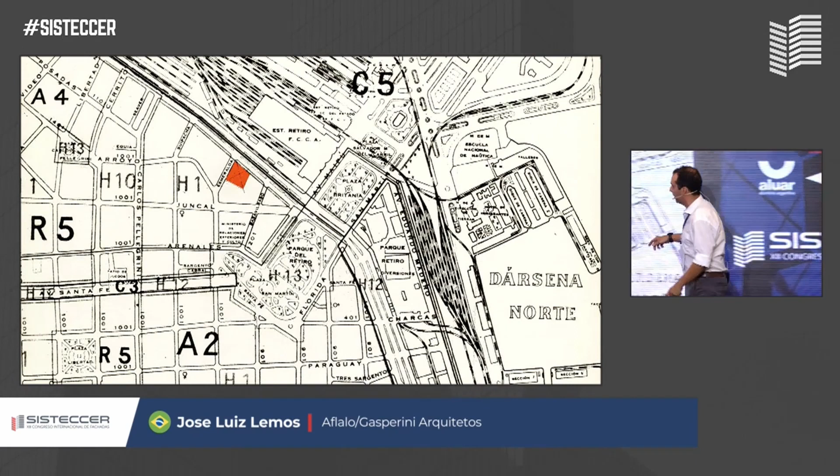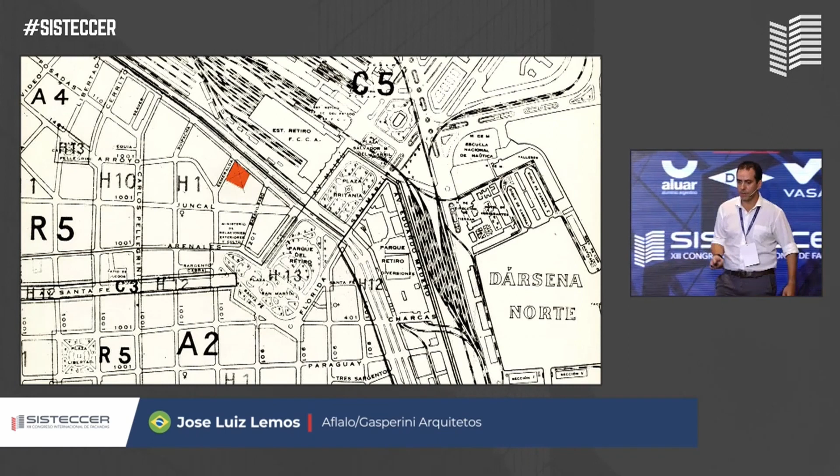The site, just to situate yourselves—coincidentally, I didn't know that—we are here right now, and the site is right on the next corner. This was an invitation. So this is today, right? We're over there. This was an international invitation for a high-rise tower.

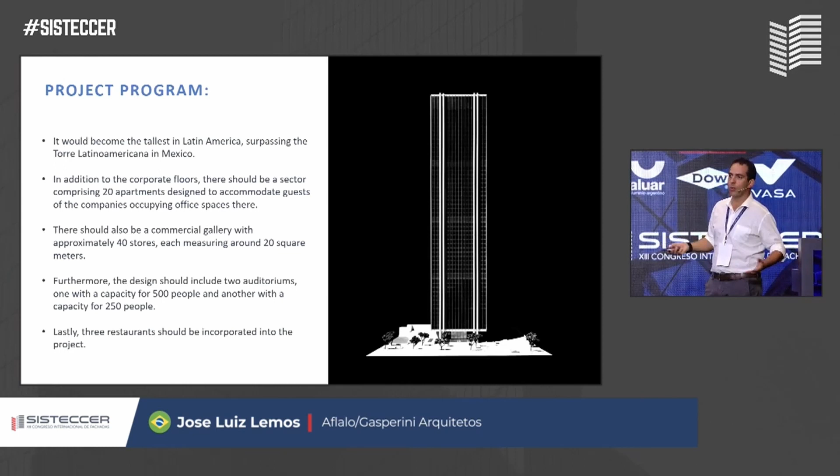It was supposed to be the highest tower in South America or Latin America, surpassing the Latin American tower in Mexico. There were almost 200 participants from all over the world, and this was the winning entry. I'll go through it, I have a lot of stuff here.

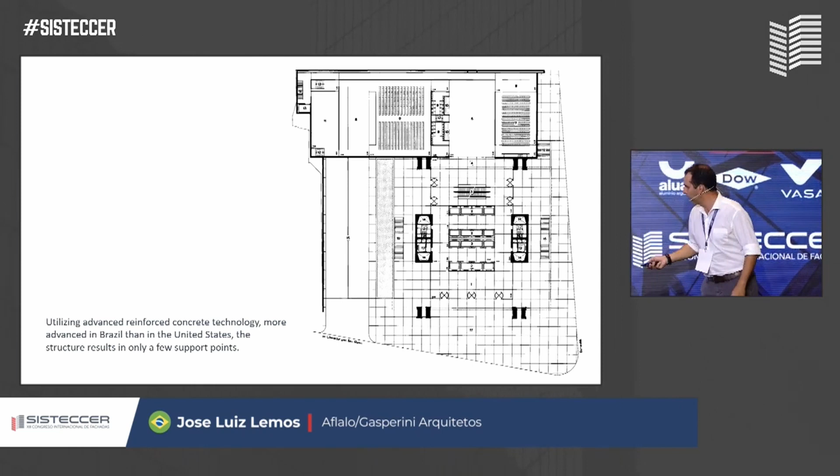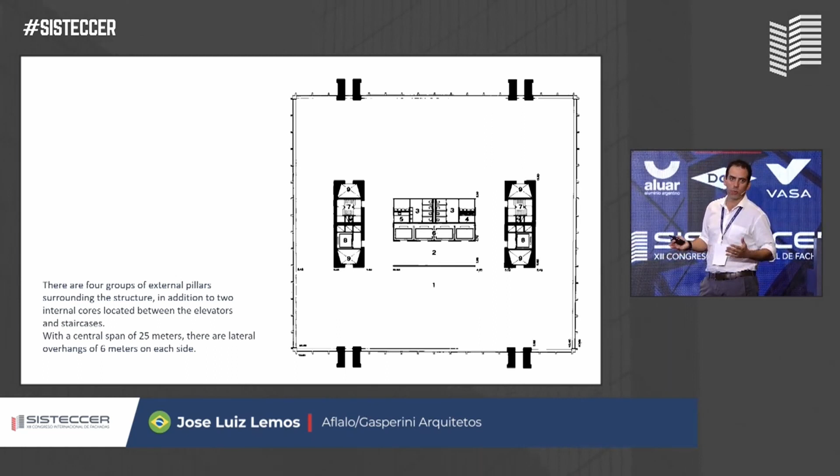It was basically studied a lot, and it set, as they say, the principles that basically set the office to work like this until nowadays.

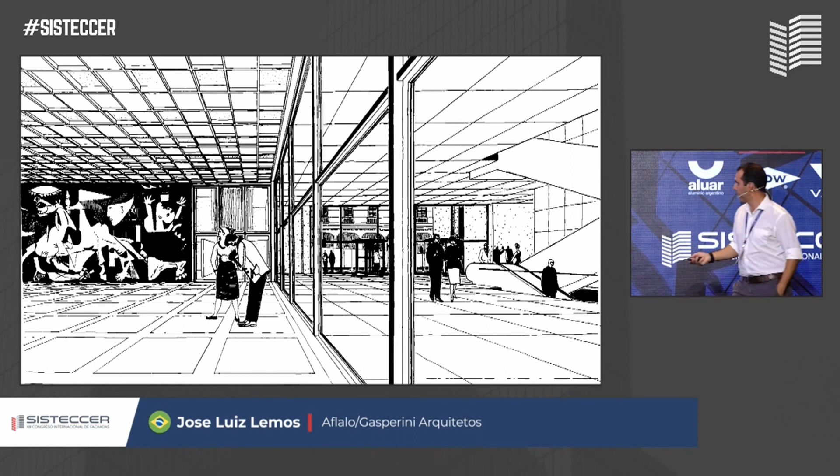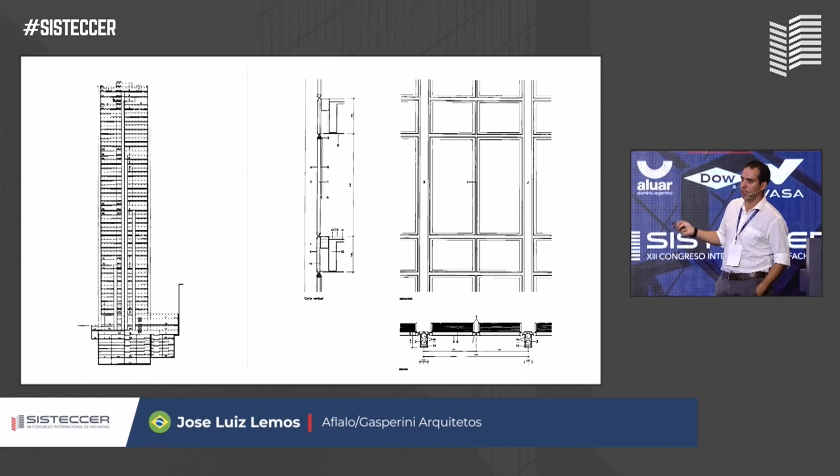Based on this project, the result and the amount of these representations of the competition entry—a lot of in-depth engineering studies went into making it as feasible and constructible as possible. We came all the way to construction documents on this, but it didn't go through to construction itself.

But coincidentally, there was an exhibition in MoMA in New York, I think like seven years ago, something like that. They had a small corner there that showed the competition entries, and they showed all these fancy things and wacky stuff.

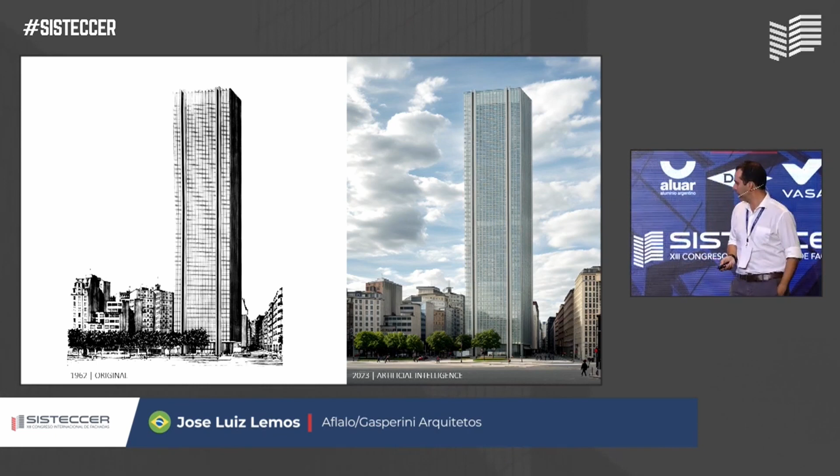So this is an image of the original, and we played with AI just to bring it here. So based on that—60 years—I'm going to throw out some relevant projects that were part of our history.

In the 1970s, we did the headquarters of IBM in São Paulo. It's still there. Later on, like 15 years ago, we did a renovation of the glazing system to bring new technology of glass and glazing, since it was totally outdated, but it's still a very relevant architectural piece in São Paulo.

From that time, we did several projects. I like to show that image because it shows a lot of representation of the architecture at that time, and also the pace of the design process. To do an image like that, you had several people working several days. Today, we have 20 renderings in 2 minutes. So it's a different moment on the project.

So this is another glass box for the Metro Operational Control Center. Some of the late towers based on a structural grid with the outer circulation cores, and some of the representation of the area.

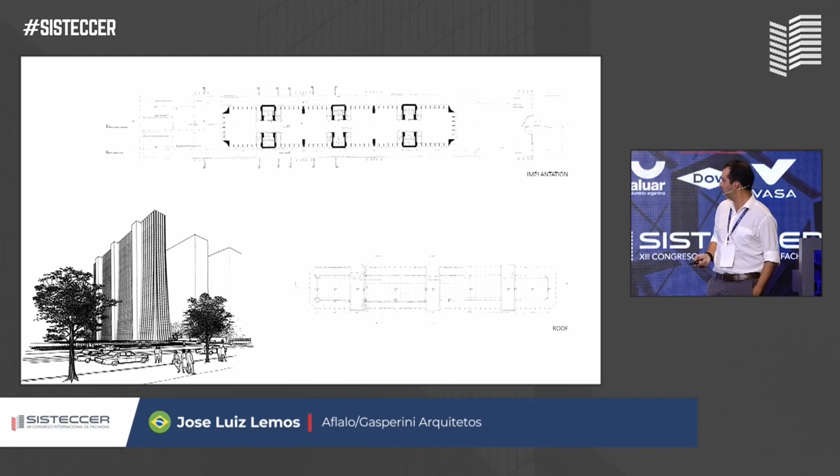This is another one, a corporate project, a headquarters of a bank. This shows some of this concrete grid with the glazed in between that we've been working as an architectural language for several years. This was a very important project in the office, because this was the Citibank headquarters in São Paulo.

To do that was a turning point in terms of technology and systems in Brazil. It was the first building ever to have a glazed system in Brazil. It was the first building to have not glued stones in the facade, but hanging with the American system. And it was the first building to have an ice refrigerator for the air conditioning and all that.

We basically had a whole office built somewhere to develop this throughout the years. And that set up the new standards for corporate office that guided us in the following years for many different projects.

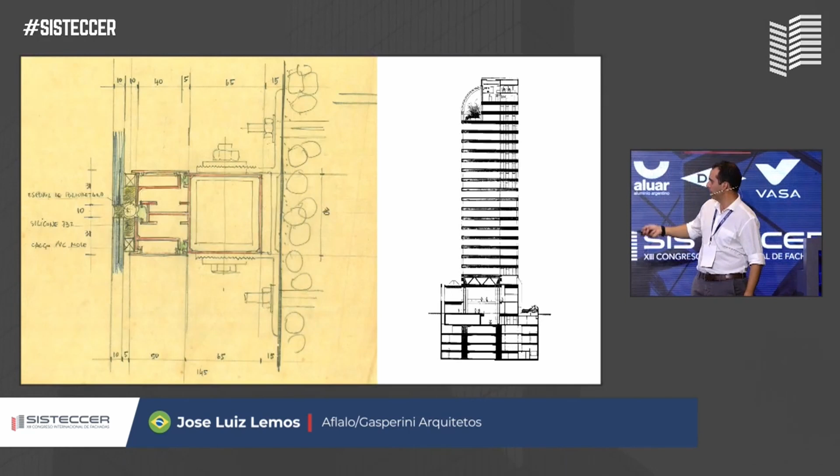I found this interesting, a sketch at the time, mid-'80s. So following that, we have a family of projects in a neighborhood in Brazil, used to be an old factory neighborhood, and we decided to design it over 2 decades, a family called Atriums, which started with that one on the right side there, creating this big atrium.

This grid we started using as a language to develop a series of a family of projects that was done throughout different years. They had a lot of urbanistic issues, like to expand footpaths, bring people to the ground floor and all that, but it's not the case here. At that time, this was very innovative as well.

In '92, this glass box started, another bank headquarters. This was also a different language from what was being done at the time.

And then we talk about sustainability. This tower was the first LEED Platinum tower that we designed in Brazil. This was done in '98. It was done a little bit late, but it's interesting that it's all glazed.

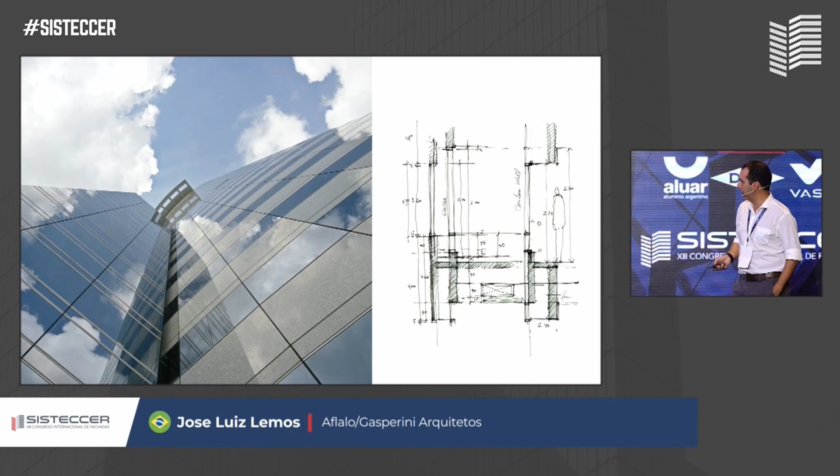This is another important project because it was the first project done with a unitized system in Brazil. This was in the early 2000s. It was kind of interesting because you could see the precision of the unitized system versus what we've been doing before that.

You could see the granite very plain with the glaze, and everything changed after that. Here you can see a moment of the project with the unitized system, and here a glaze within columns built separately, and then the terrace here. So you have 3 different construction systems in one picture, we had it all in that project.

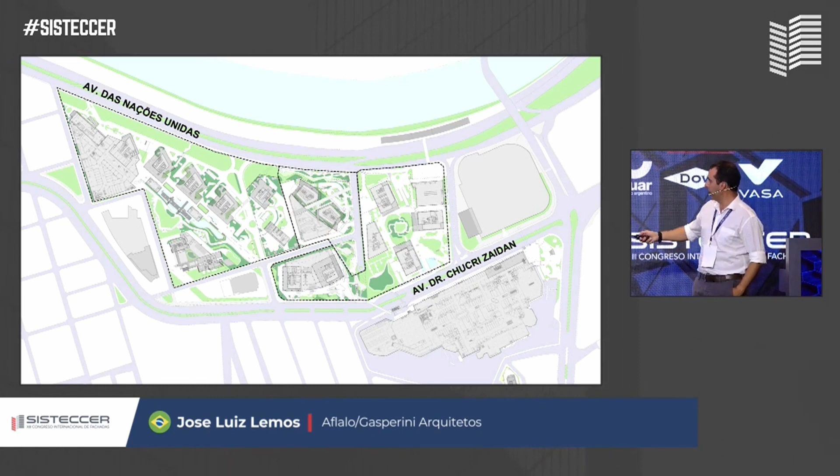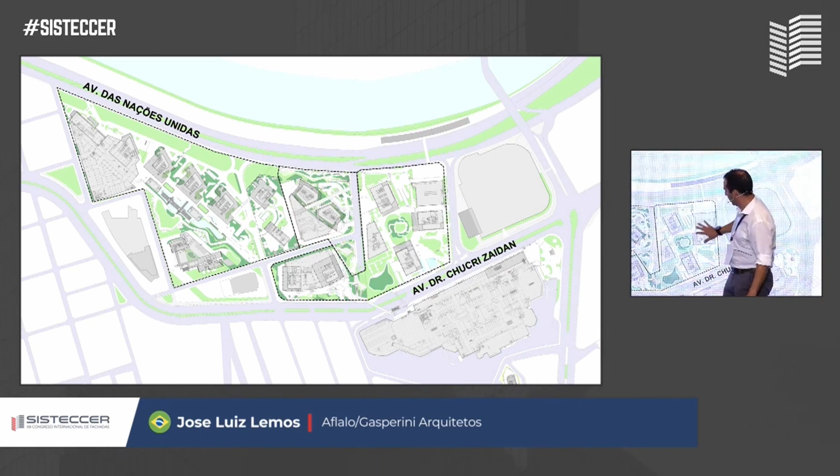This is an area where we did several projects. This is one project we did in the late '90s, including all of these towers here and this footpath. Several corporate towers developed over 2 decades, so basically we did a lot of work on these towers here.

So this is one of them, Rochaverá. I believe that's where some of our Dow offices in São Paulo are, and some of the images here.

This is another project which was the same owner as the shopping center across the street. We had the opportunity to design a footpath that links both malls, a glazed, air-conditioned pedestrian bridge open to the public.

It was an interesting project to develop with escalators and all that.

Still on certification, I'm not talking a lot about sustainability here, but we always say that it's a consequence of the process. We always did that, and of course the new materials and the way you measure and the glazing and all that lead us to whatever we are developing.

This was an interesting project where the client said, I want two towers, but it looks like one. There had been a competition done elsewhere that didn't happen, so we had the idea and brought it here. He was shopping around for different architects, but in like three days we had the design and went forward. He bought it and all that.

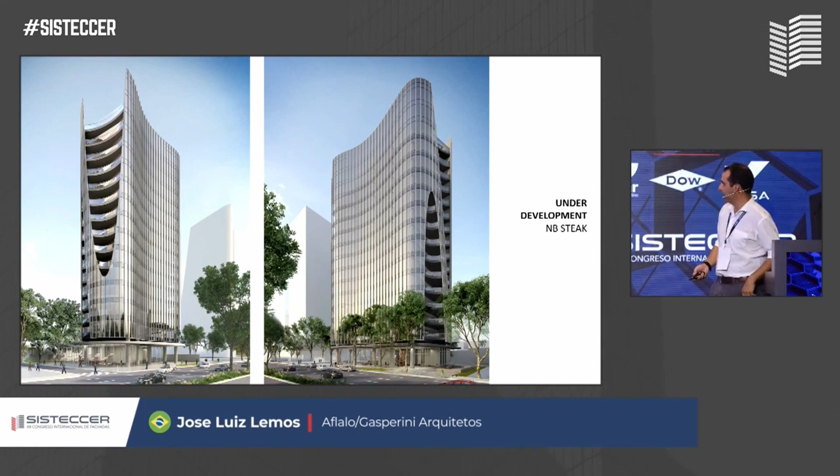And some of the other stuff that's under construction now, like this. I still have some time here, so some of the stuff going on right now in our office, some of the latest developments under development.

Another thing we've tried to use a lot is playing with textures, using the mullions and details to create something intricate with the architectural language, bringing scale and language to some of these. Those details, with small overhangs and transitions, let us do an architectural composition that creates interesting moments.

Depends on the light of the day, the shades and all that, kind of nice. Or otherwise, with these terraces, we also try to do something playful with them.

It has some nice moments, sometimes it's just a very simple glass plate that defines the building. What's interesting in this one is it has this shading device, but the surrounding is all chaotic residential buildings, and then you have this big mirror in the middle, which is interesting because it melts everything out, and it doesn't try to stand out from the rest of the buildings, but it blends it all, disappearing into the landscape.

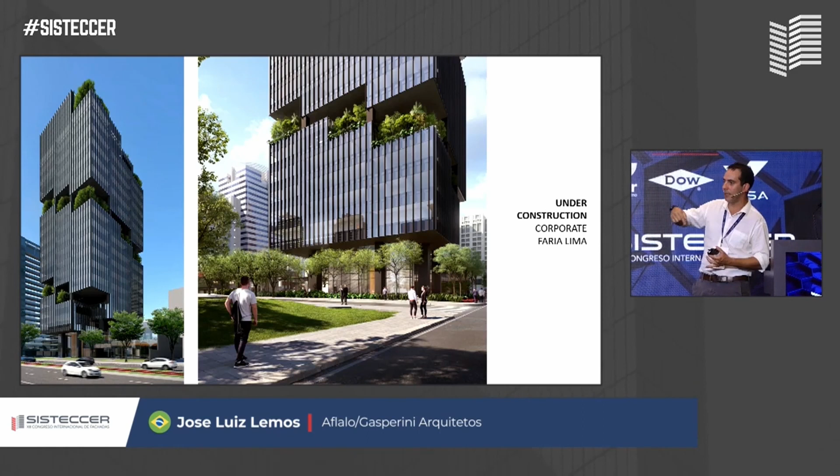You can actually walk throughout the building from outside this office space. And this is the kind of environment you have in each of the floors, and you can actually go from one to another. So if you lease 3 or 4 different levels, you have all of this communication space, this buffer of green gardens, and it's right in the middle of the city.

This is an interesting project. We've been working on it now, but we've been working for the past 6 years actually. It's interesting because it has a bit of everything.

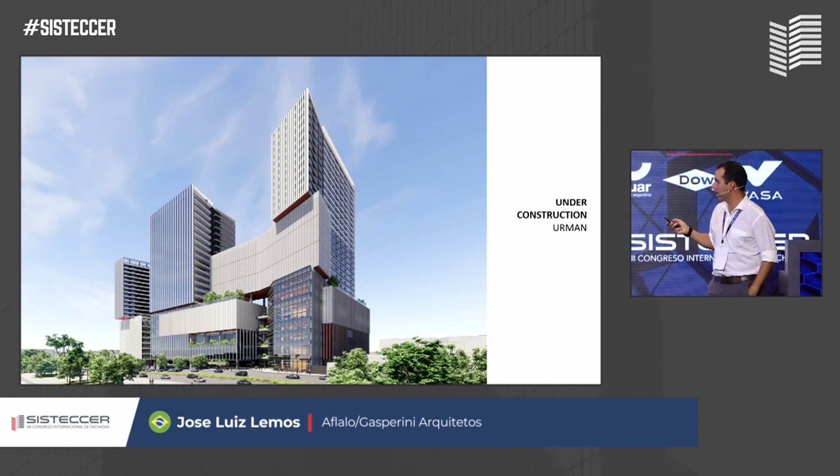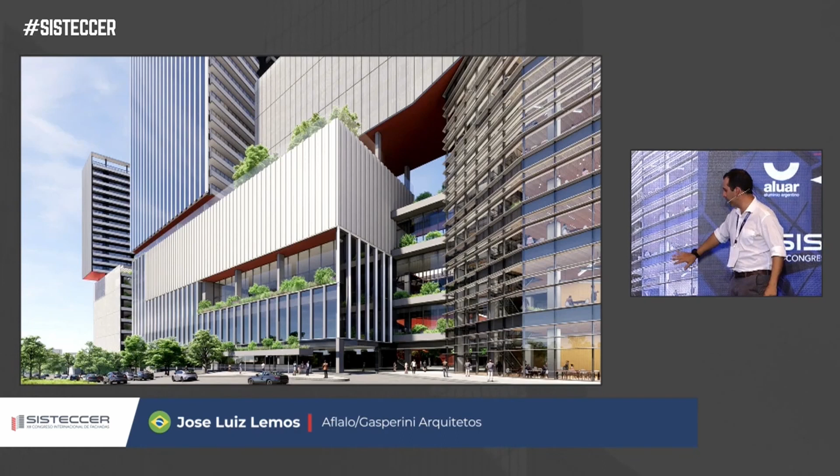This is like a very - we wanted a very transparent, it's kind of a gastronomic tower we call it. This is a very busy road, so we want this to be as transparent as possible. So we're looking for low-E glass.

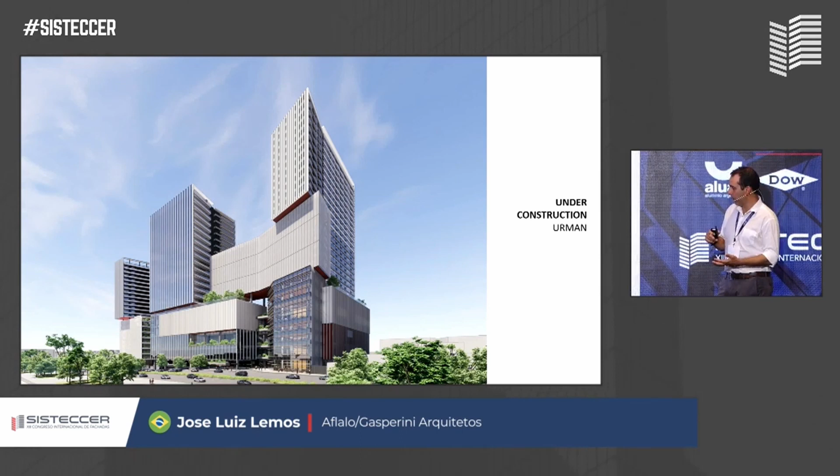We're using the shading device, we're also using the insulated glass and all that. So the client understands that this is the place where we have to put all of our energy.

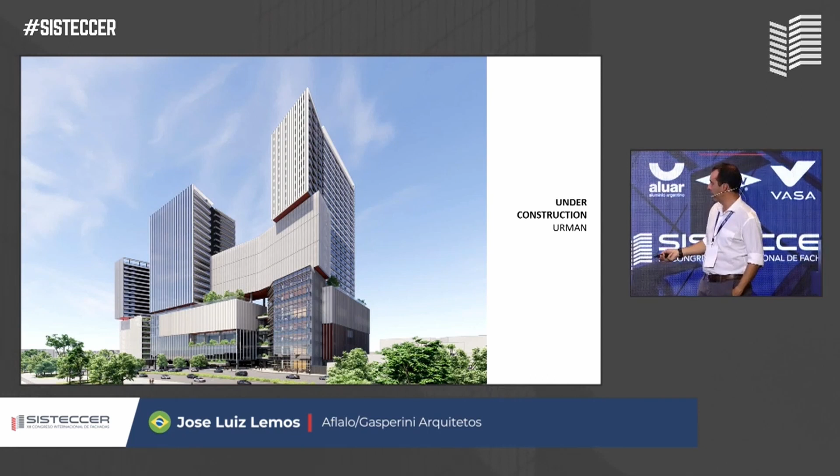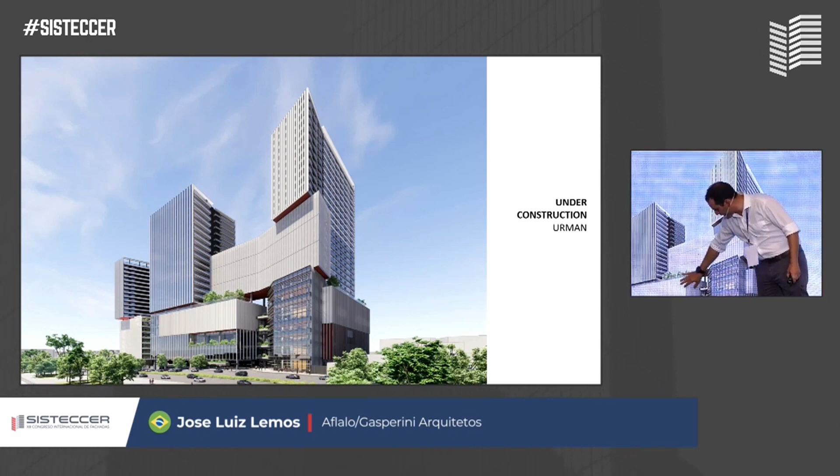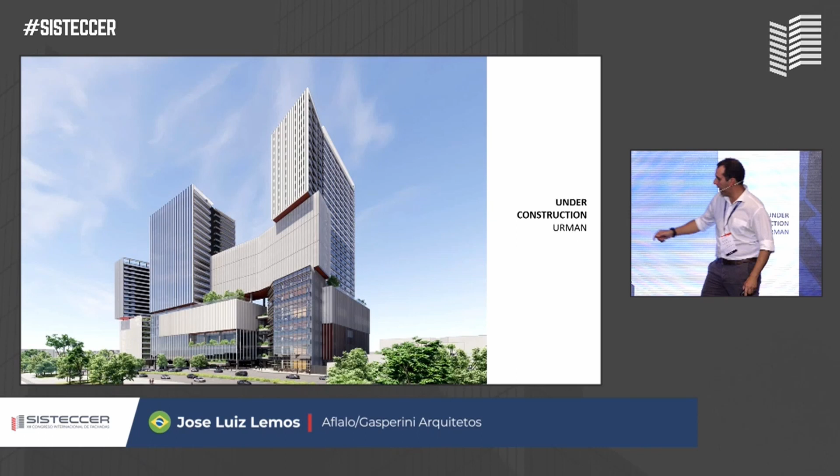But then the rest of it - we have a residential tower, this is a hotel with 300 rooms, this is a 400 compact unit residential tower, this is a corporate space, this is a hotel with 12 cinema rooms, it has a 1,500 person theater in the back, a mall on the first floors, and this is a hospital here. So it's kind of everything in one.

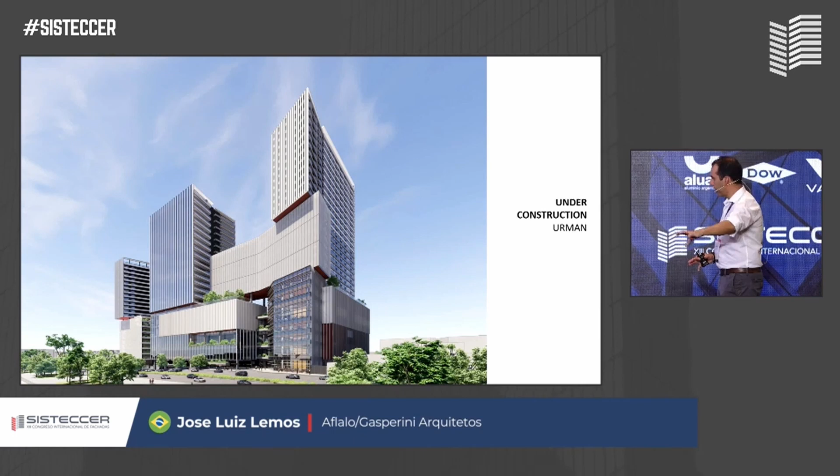We're building up a small city. It's a 150,000 square meter built project. But it's interesting because it's not in an obvious area - it's kind of an area where the client wants to set up a statement and develop a new center.

It's constructing it, but I like that we went through this project before the pandemic, and then came the increase of cost of construction in Brazil, especially aluminum, to such a point that he came to us like, you need to take aluminum out. I said, what? What do we put there, right?

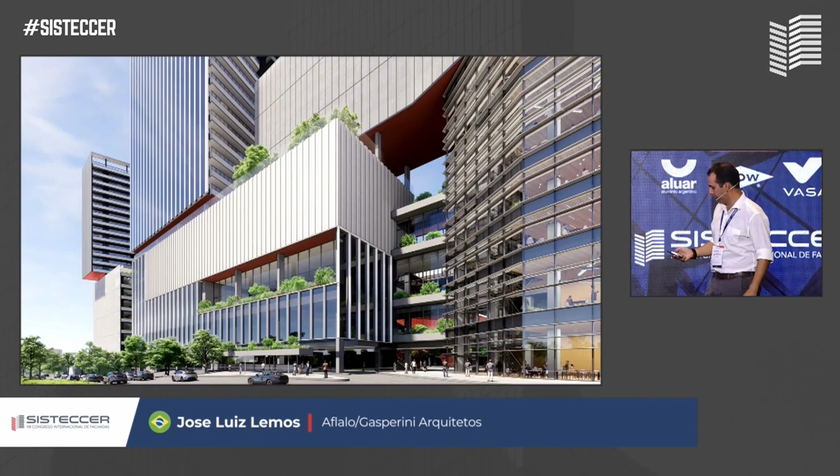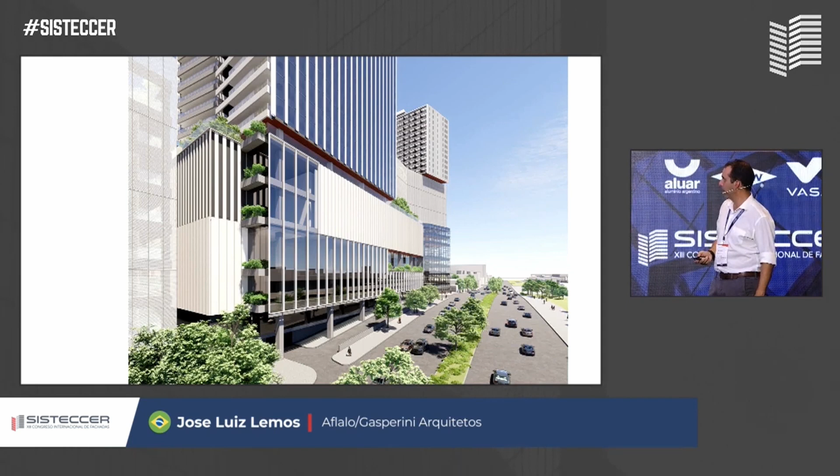So we did a lot of rationalization, trying to minimize the volume of aluminum. Of course, still mainly everything is glazed in aluminum - this is a metal sheet, precast elements, but this is already a result of a very rationalized building. We went through a very exhausting process there.

So some of the moments - this is going to be very impressive. This is the residential tower that you can see here.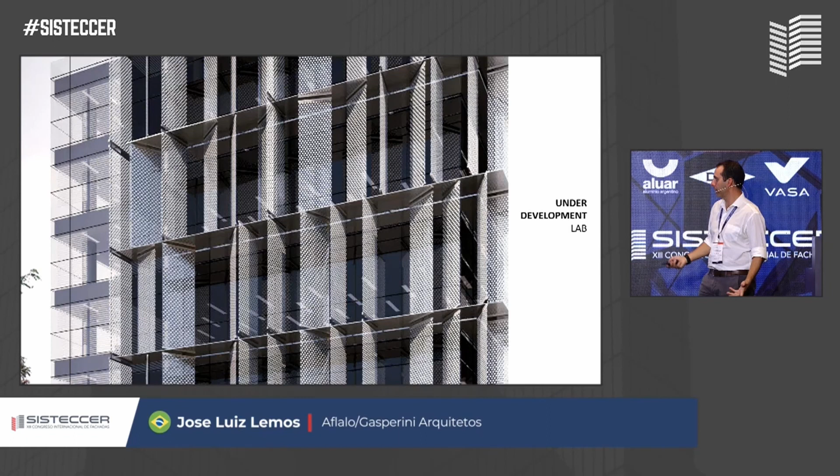And also with this plinth facade, we can actually orient to the right sun orientation. So this is kind of the critical orientation, we minimize it, and then we bring this fritted pattern. This is a small building in Brasília, and a shading device, the second skin, something we're trying to implement. This is a headquarters for a pharmaceutical company.

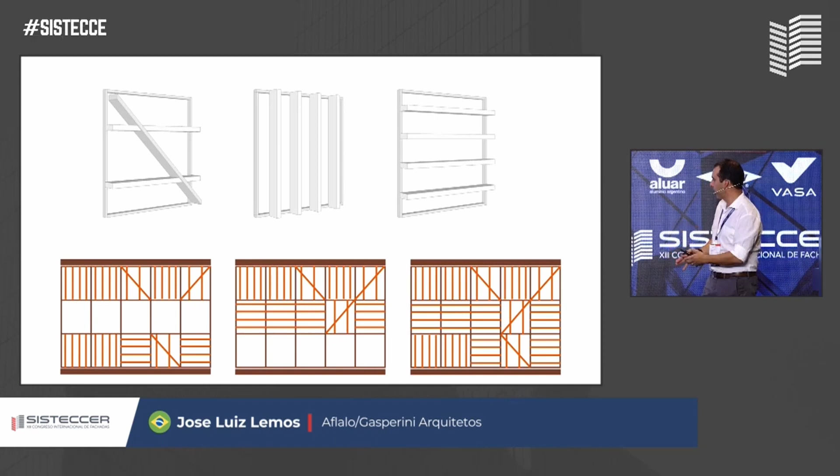We said, okay, very local - you look at this image, you see all of this, boxes of wood and foods and organics coming out. So we came up developing this shading device to put on the facade, and then play with that according to the orientation, like east and west facades and all that, different depths.

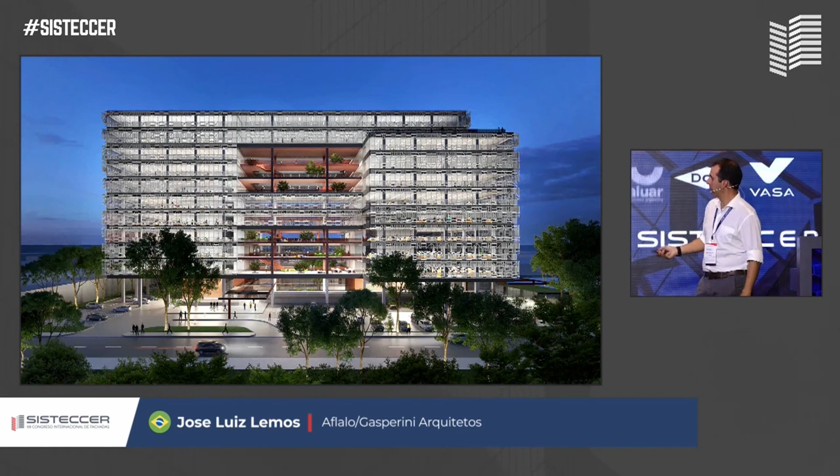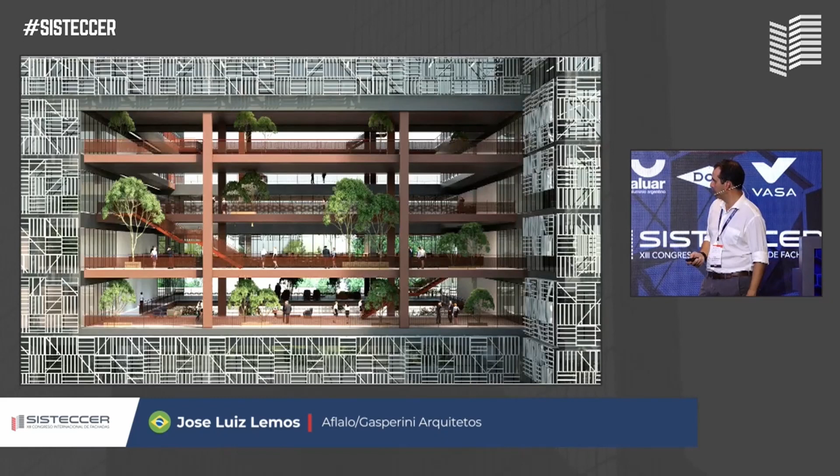This is very concept design, but bringing those elements as this second skin with a very unique pattern and identity to the building. And it had this interesting middle spaces of communication where people would actually meet together.

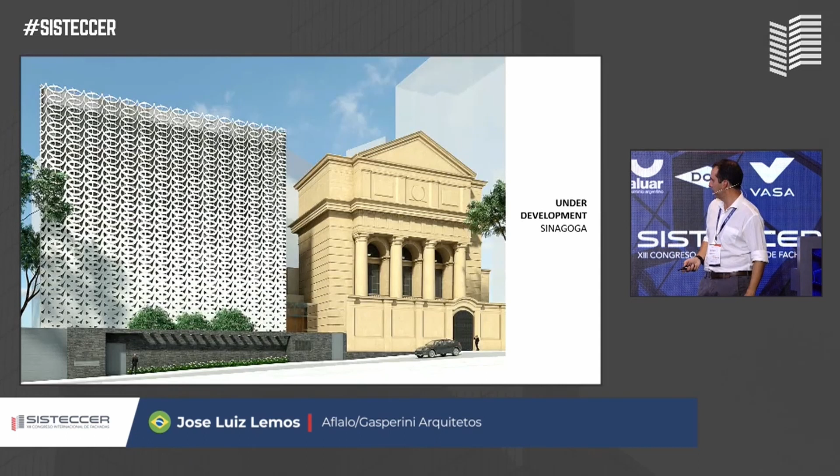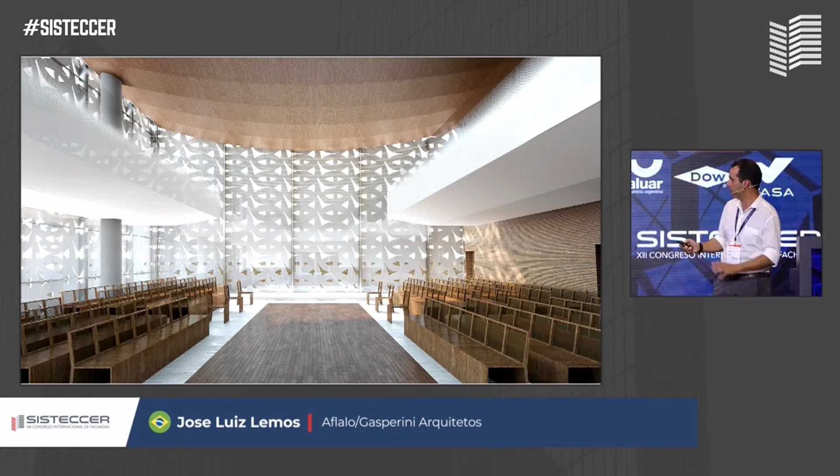And then this is a church synagogue, which we developed all of these patterns here. This is also starting construction, almost next year I think. Thank you.